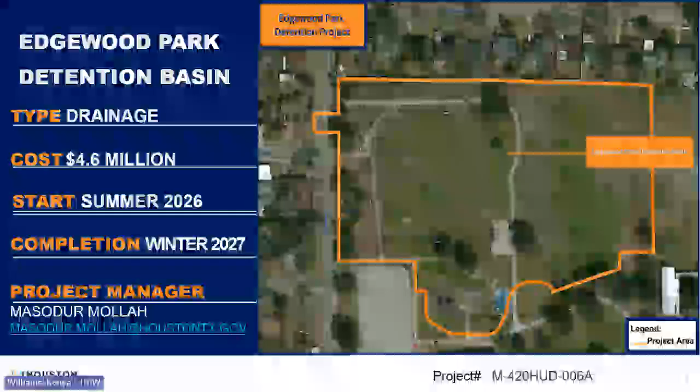Before construction starts, Houston Public Works will host a virtual How to Prepare for Construction meeting to ensure the community is informed and ready. This project is a step forward in making our city stronger and safer, and we're excited to bring you along the journey.

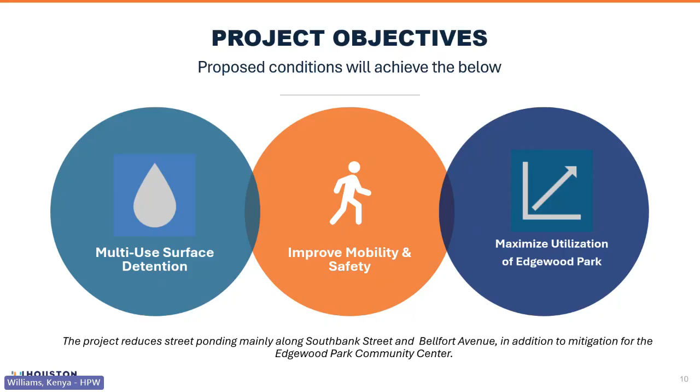The pond towards the sports field, to the right, is about 2 feet deep on average. To the left is about 4 feet deep. We have also provided some kind of safety treatment on the pipe so that no animals or anything else can get into it. As you can see on the bottom right of the exhibit, there's an example of how it looks.

Thank you. With this, I would like to ask HR Green, engineer of record and design engineer, Scott Cunningham, to present the other slides. Thank you.

Scott, you're on mute. I got the camera on.

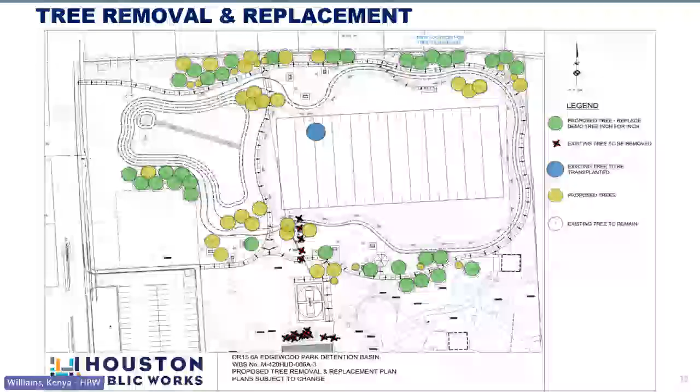This slide shows the tree removal and replacement for the project. There are many trees surrounding the basin that we're going to try to preserve and protect. There is one that we're going to transplant to save it. We're also going to plant additional trees, shown in yellow, around the basin. This helps with visual disruption and also provides shade for people who want to enjoy the park and have picnics.

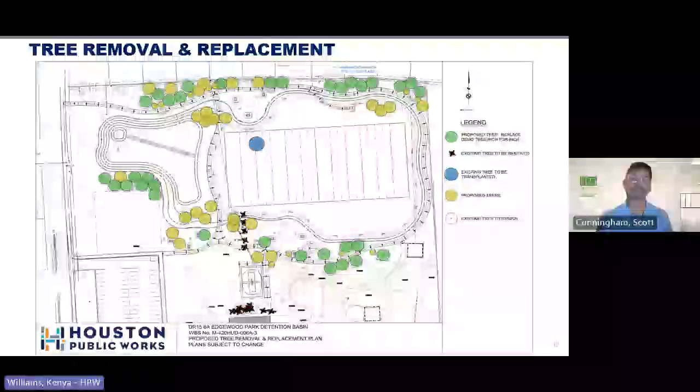This is an image rendered using 3D software by our landscape architects. It shows an angle of the detention basin from Southbank Street looking to the southeast. This skinny part is a bit deeper closest to you in the picture, while further away is the football field and baseball field, which will be shallower. The runoff will drain away from the field to the edges of the basin. That swale will pick it up from the edge of the basin, take it underneath the sidewalk, and then into the Southbank storm sewer system.

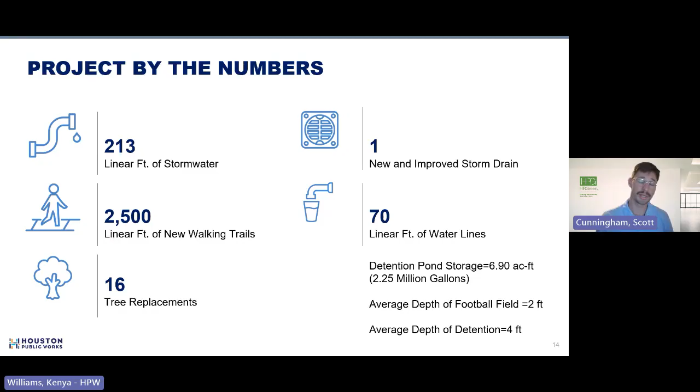And there's 70 linear feet of water lines that's going to be replaced due to conflicts. In addition, there's a few more items in the bottom right corner where the detention pond is going to provide roughly 7 acre feet, which is 2.25 million gallons. The average depth of the football field, like we mentioned earlier, is 2 feet, and the average depth of that detention on the south side, closest to Southbank Street, is 4 feet deep.

The next steps for this project - we were in the planning phase, but now we're in the design phase. I think they mentioned that earlier. We're submitting the 100% soon. Then the construction phase is planned to start in 2026.

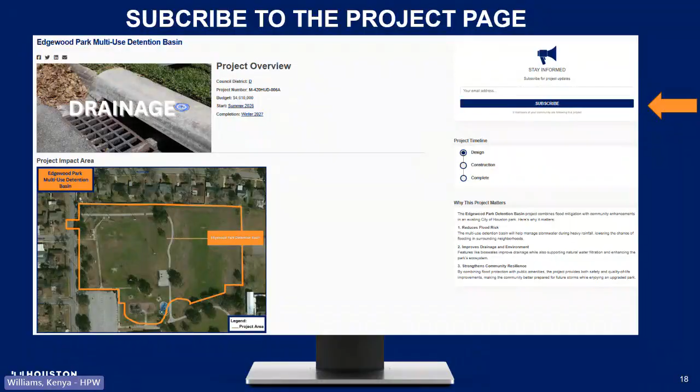Welcome to engagehouston.org, your go-to hub for staying informed and involved in Houston's infrastructure projects. Want a different language? Hit the globe icon in the top right corner and select what works for you. Under 'You Are Invited', you'll find upcoming virtual community meetings, each with a join link that goes live when it's time. Click on any project page to explore budget, timeline, maps, and why it matters.

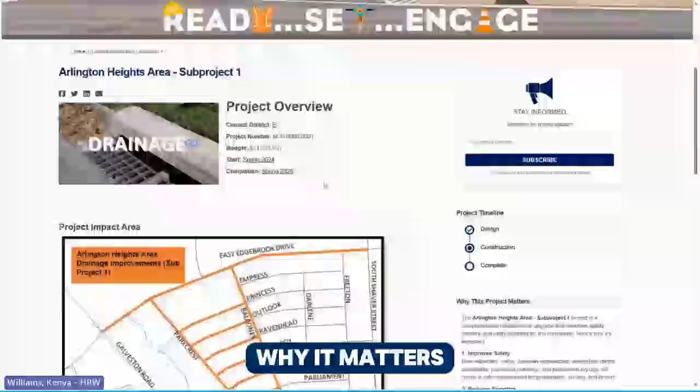Scroll down for construction info, downloadable plans, and updates. Got questions? Use the FAQ or Engage Us tabs to connect with our team. Use the top menu to explore current reconstruction projects across the city, or type a project name into the search bar.